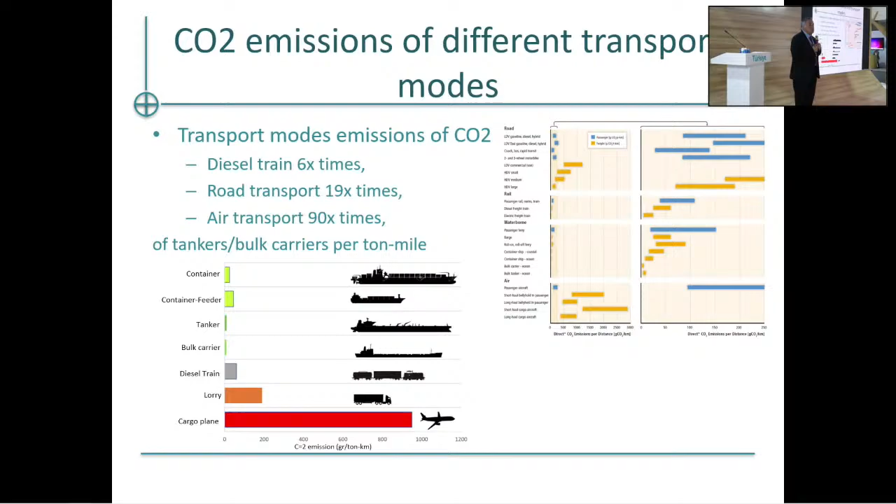Before we start, I should like to underline very carefully, maritime transportation is one of the most efficient transportation means for GHG emissions. Why? Simply, for the carriage of cargo, the tankers and bulk carriers, emissions is only 1/90 of air transport. So air transport produces 90 times more emissions. If you look at it this side, we can say maritime transportation is one way to reduce the emissions all over the world.

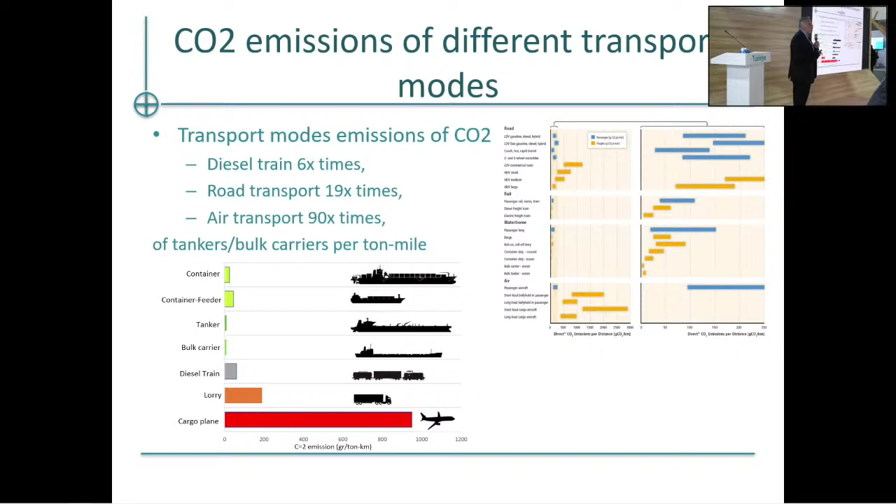Second point, the total emissions produced by the maritime transport is only about 11% within the transport arena. 80% of the cargo is carried by the maritime transport, but only 11% of the emissions.

We need to go back and start up from the main principle. The principle is the fossil fuel consumption is the main reason behind the emissions in the maritime industry. If you are in a land transport, there are other options. But in case of an international maritime transport, this is not possible. And let's not forget, 1 ton of petrol products, which can be a heavy fuel oil or it can be diesel oil, produces 3.2 tons. That means we are actually increasing the quantity by the consumption of the fuel.

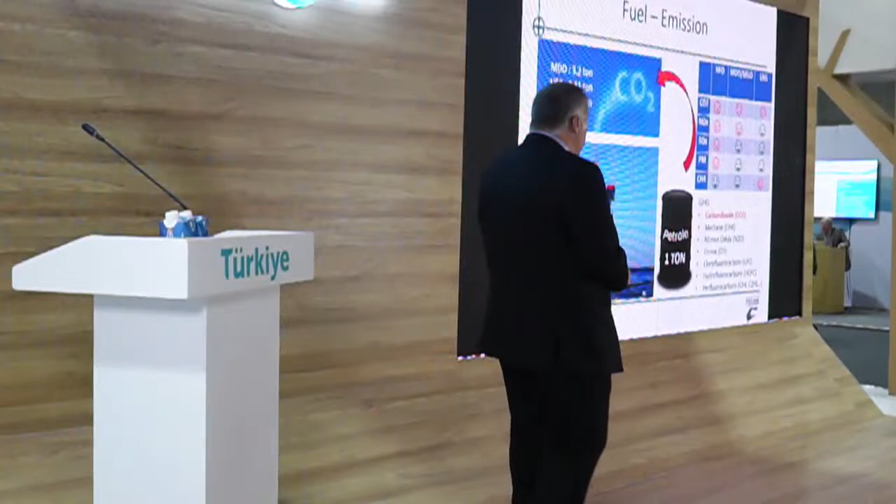There are lots of rumors saying that LNG is a solution, which is not, unfortunately, because LNG's emission potential because of the fuel consumption is 2.75 tons instead of 3.2. So only about 20% reduction can be achieved by use of LNG.

So what is the drive behind the decarbonization of shipping? There are different ways to look at it. First, we can look at it from energy efficiency. Secondly, we can look at it from new alternative fuels, which will be different from a road transport point of view. And lastly, we can talk about carbon capture.

What are the obstacles? The first obstacle is the production of the alternative fuels. Storage difficulties, non-availability, lack of experience, and finally the cost. People are talking about utilization of hydrogen as a fuel on shipping. That isn't an easy process because these problems make it almost impossible for now.

So the projections, the pathways are being lined up for 2050. What is driving it? Which I will be talking briefly about, is IMO regulations and the driving force of the EU, Green Deal mainly, and the charterers and financial companies. Poseidon principles is a necessity nowadays for any maritime transport financing mechanism.

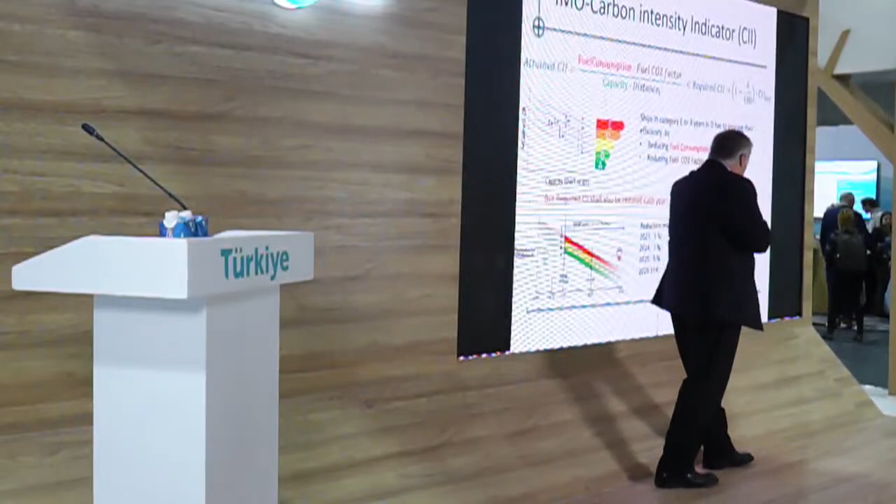An alternative regulation is coming along with the EU, and EU ETS is an extension that includes only the transport mode of maritime. The new regulation will probably come into force in 2023, and it will bring a cost increase for any consumer. All ship travels to and from Europe will be somehow, I would call it, taxed, because it's called ETS, emission trading system.

However, there are no allowances. Everybody pays, all polluters pay. So it's actually a kind of a tax, but the tax rate is found from the European emission scheme. What is the cost for the Turkish side?

At least 125 million euros per year. If the EU Parliament revision is accepted, it's about 250 million euros per year for Turkish ships only. And if it's globally applied, it's about 900 million to 1 billion euros per year. So it's quite a lot.

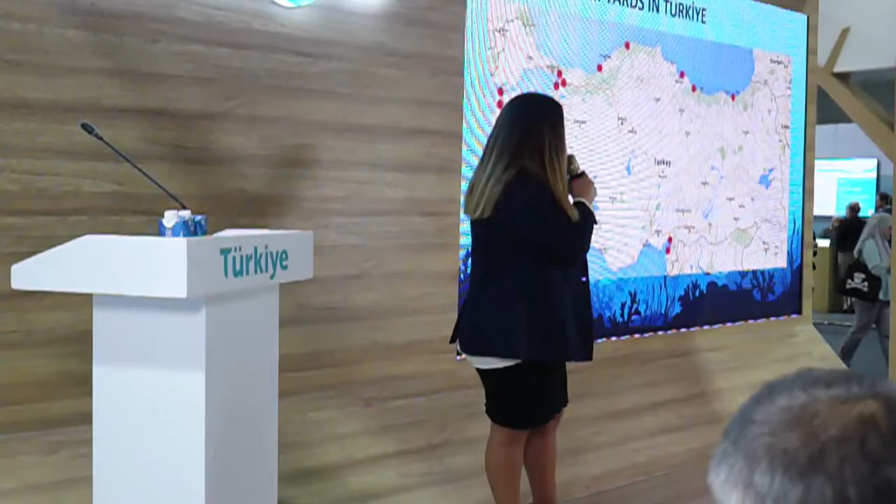Now I would like to explain the environmental impacts of shipbuilding and the measures we developed. Shipyards are very important for Turkey. We have 84 shipyards now. On the map, I illustrated the main districts of shipyards - they are all around Turkey, we have shipyards on all our coasts.

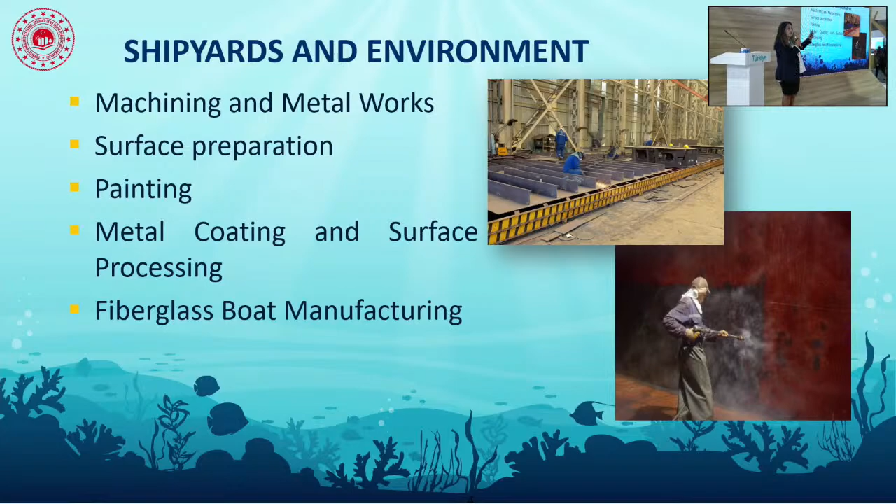When we consider shipyards, this is part of the decision-making process - we try to understand the processes they have. For the shipyards we mainly categorize them into five: machining and metalworks, surface preparation, painting, metal coating, surface processing, and fiberglass manufacturing of boats. These are the production processes we have in our shipyards.

Then we review all of the national and international legislations, conventions, and directives, and go through them. We examine the processes and the possible pollutants. Then we determine the environmental quality status of the sea where we have the shipyards - mainly the most crowded districts are chosen. Then we go through cleaner production options for shipyards.

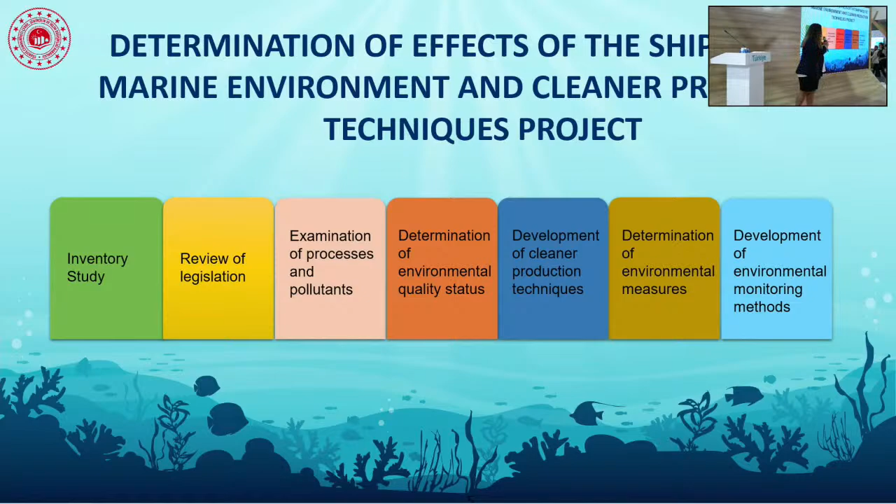This is the most crucial part of this study. We try to cover the literature, but we also go on site and try to develop some measures. Then we determine the environmental measures, considering these cleaner production techniques and mainly the good environmental status of the seas. And then we develop some environmental monitoring methodology - I will explain some in detail.

We go through some cleaner production options. That means we first consider sound environmental management of these shipyards - these are mainly administrative measures. Change of production materials is an option, including design, production, and recycling material parts. We also try to go through better process control, which includes wastewater, water usage, and waste management parts - we develop better options for managing these.

Equipment modification, because the production processes are more or less the same all around the world. This is mainly about the energy. Energy modifications mean having cleaner energy, whether it comes from fossil fuels or renewables, and mainly the energy efficiency of the equipment.

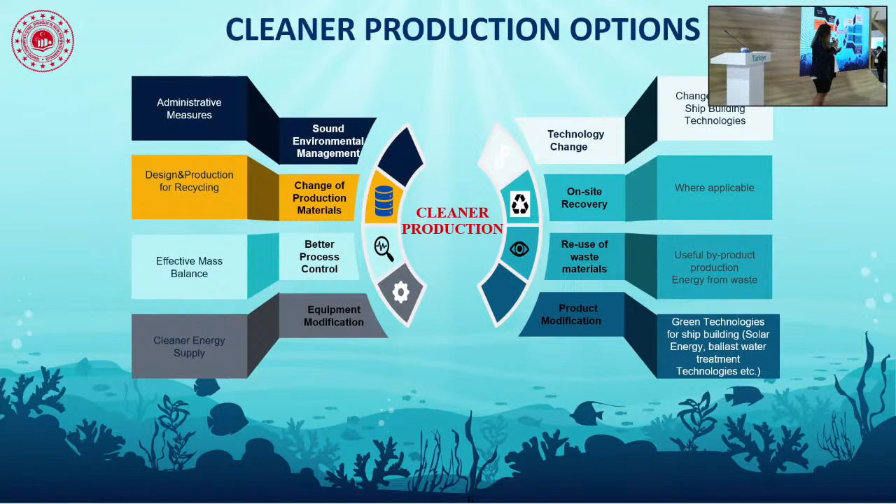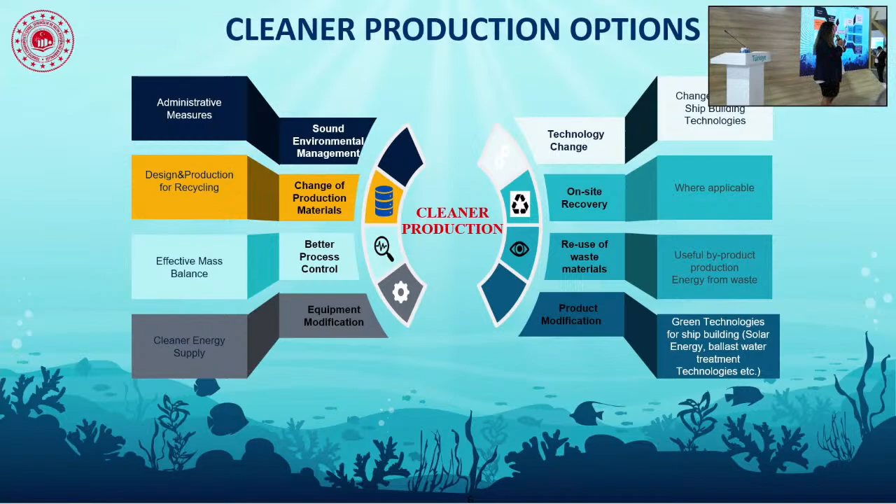And then we go through at last product modification, which is mainly about the ships - the modification of the ships, considering ballast water, energy usage, and kind of.

So we prepared the draft legislation. It's at the last stage, we have the last version in hand. The main aim we categorized them for - they are mainly geared toward the main aim, which is to improve and protect the marine environment.

To have good environmental status of the seas, we go through efficient use of energy. We try to reduce greenhouse gas and other pollutant emissions, and we develop implementation of renewable energy projects in the shipyards.

The first measure is about the ballast sediment. There is a convention named the Ballast Convention, and there is the MARPOL Convention. They say you have to manage ballast sediment. In the ports, it's not available, so the shipyards are the point of management for this ballast sediment. Ballast sediment means the sludge that we have over time under the ballast tank.

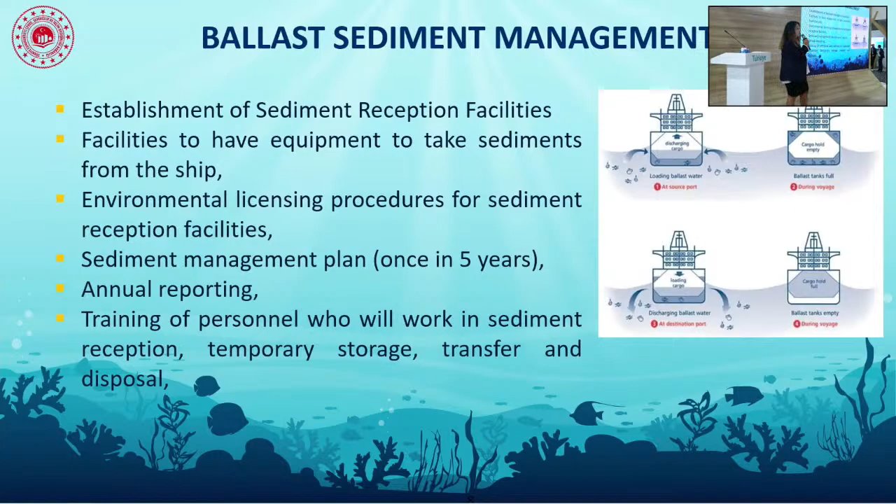So we have the measures. You have to have sediment reception facilities and necessary equipment. Our request is to have licensing for this procedure. We want a sediment management plan to be applied once in 5 years, annual reporting, and training of personnel who will work at these processes. We go through the cleaner production options.

We define some emission limit values for total organic carbon and dust, for completely closed, new production zones. And we said there has to be a tracking system to monitor the docks.

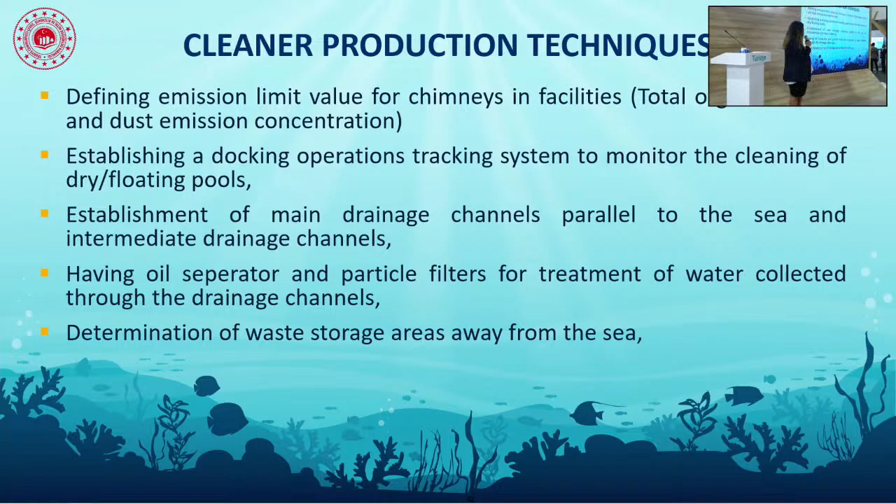And we want some main and intermediate drainage channels to avoid pollutants going through the sea directly. And for this water, the draft legislation requires oil separators and particle filters. They are new for Turkey - this is not something they have in the literature of other international or national legislations. And we want determination of waste storage areas away from the sea to reduce the risk.

So, very applicable, we want dyeing to be closed. And the legislation wants performing surface preparation and painting in a closed and impermeable zone.

Preferring renewable energy sources - all legislation considering best available techniques has musts and offers. This is an offer, I can say very applicable - they have to use renewable energy sources. This is the one that is most related to climate change, directly related, not indirectly.

Reducing the energy used by 20% in 7 years, and electrification of the service boats in 5 years. This is also about carbon emissions.

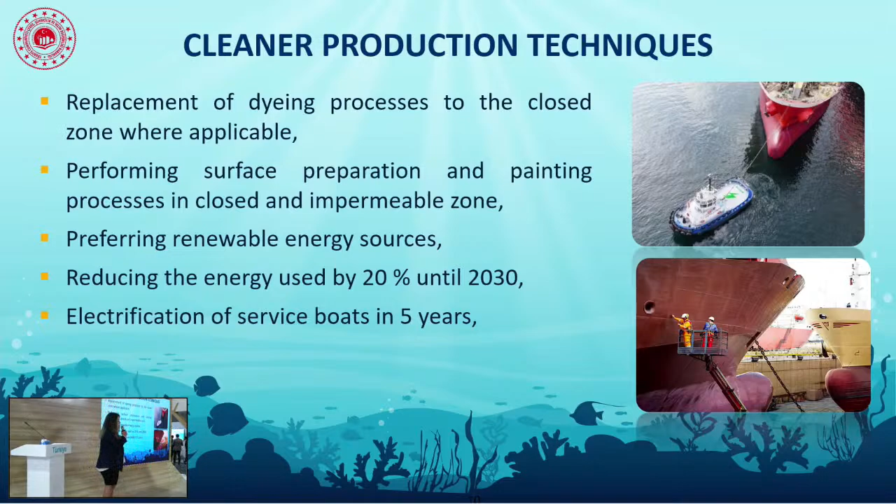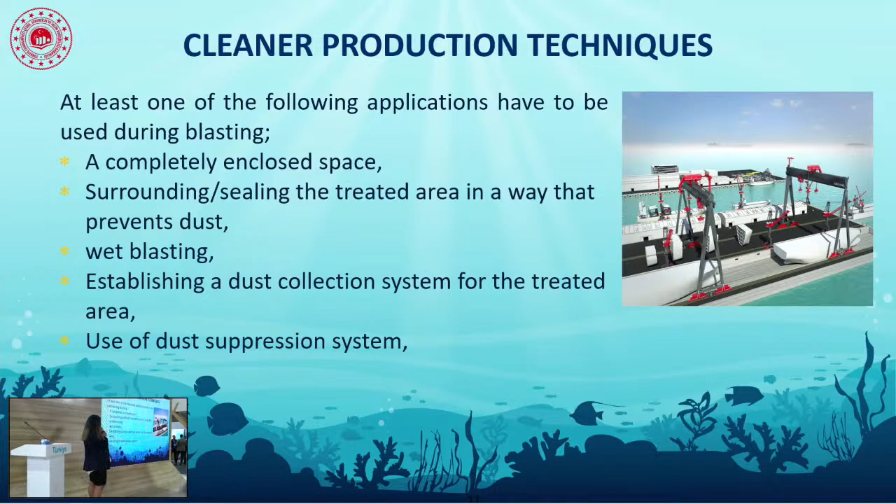We want blasting to be - we want them to choose one, or at least one. It may be in a complete space, it may be surrounded. Wet blasting may be an option, not commonly preferred. We want them to establish a dust collection system or use a suppression system to eliminate dust.

And the draft regulation also requires a report in order to understand whether the shipyards are applying all of these measures, and how. So we want to monitor also the implementation of the draft legislation. We hope to publish them in a short while. Thank you very much for listening.

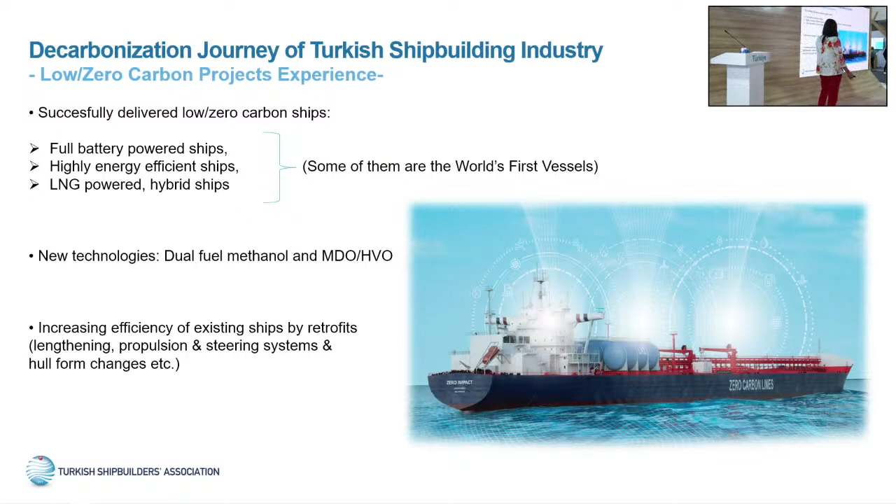And also, as Mustafa Insel mentioned before, there are some technologies that we can use for existing ships and for new ships - new propeller and rudder designs and manufacturers such as gate rudder, twisted rudder, wind technologies, new alternative fuel engines, after treatment technologies.

We are also really experienced with scrubbers and exhaust gas recovery systems, and possible future technologies might include carbon capture technologies - not available yet, but I think we can see them on ships in the near future.

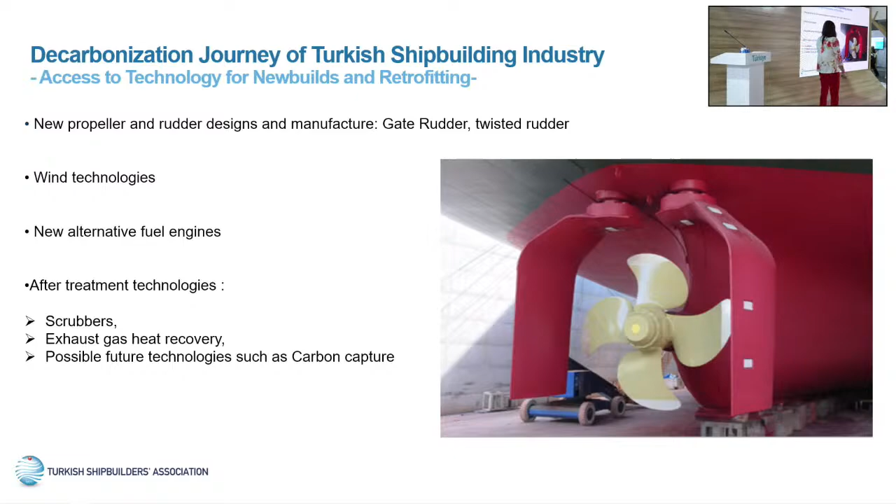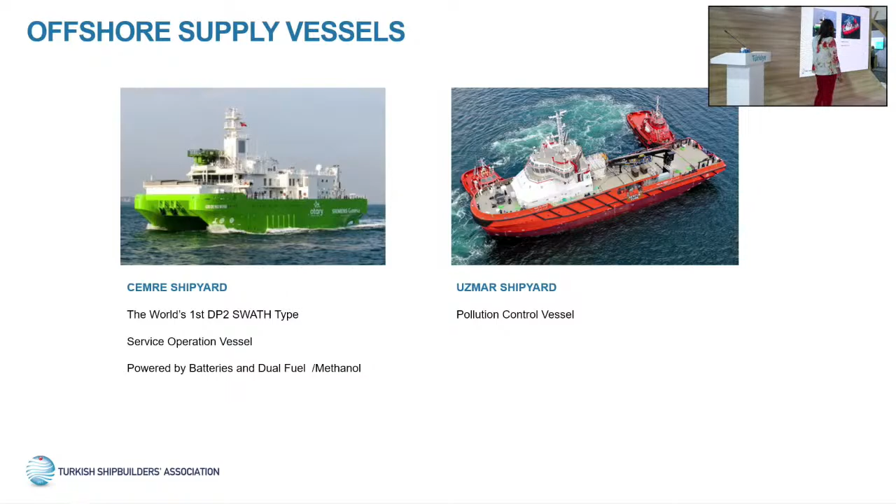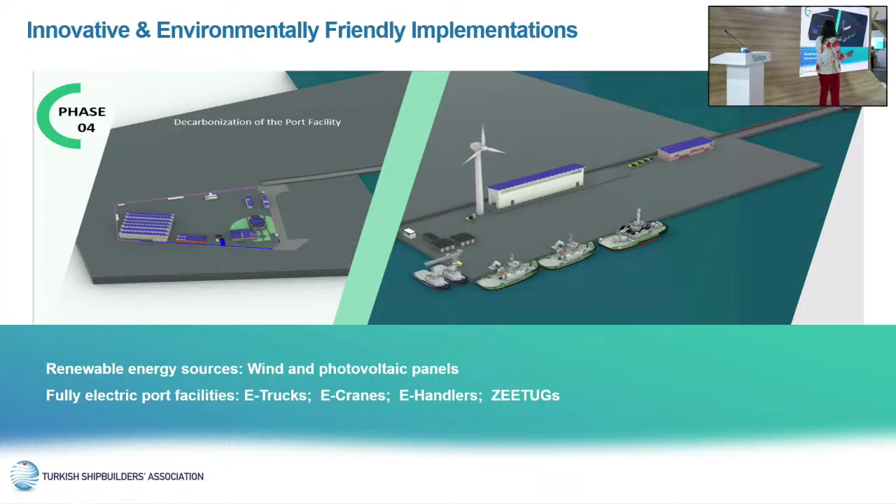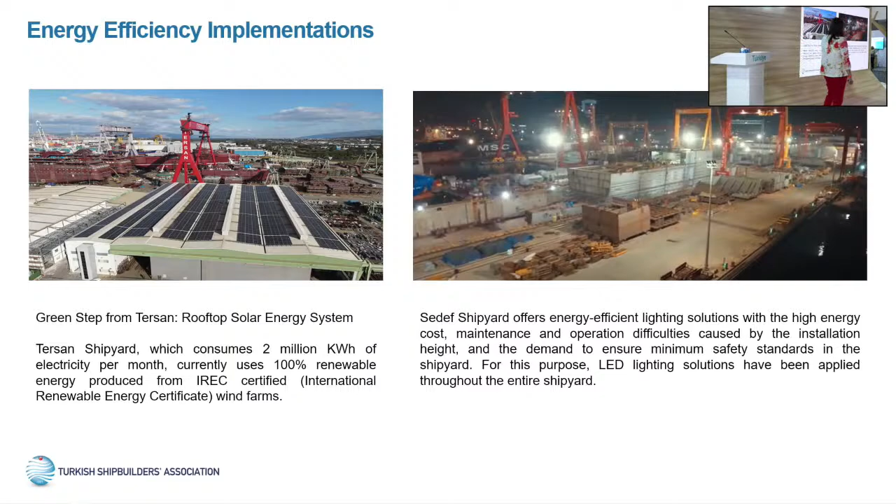What about the shipyards? Nazan has already mentioned there might be some restrictions about shipyard studies. So we are really focusing on new alternative energies and also reduction of GHG emissions due to manufacturing processes. Some of our shipyards are now using rooftop solar energy systems, and also some shipyards are changing their lighting systems.

Also, as an association, we are a member of one Horizon 2020 European project. This is a new technology for the shipbuilding industry. You can see some other partners from Europe, such as European Welders Federation, TU Delft University, Stirweld, Aclunaga, Element Six. Now we are studying the application of friction stir welding technology to the shipbuilding industry.

This technology has some advantages in shipbuilding, as there is no consumable material for welding. It's something like not using any consumable material, like a forging operation. So there is no output, there is no consumption, and also the energy use is more efficient than classic welding technologies.

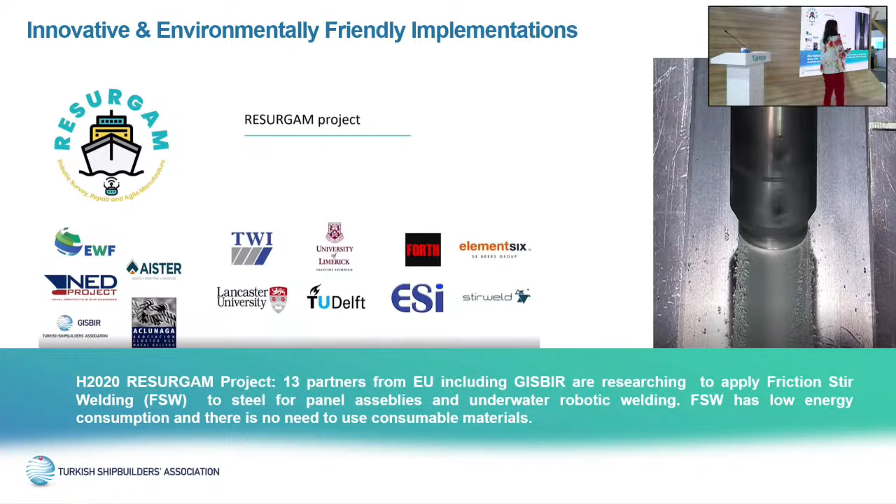And also we have conducted some life cycle inventory studies for various ship types, and we have uploaded this data to an international database. So you can see some Turkish examples in international databases.

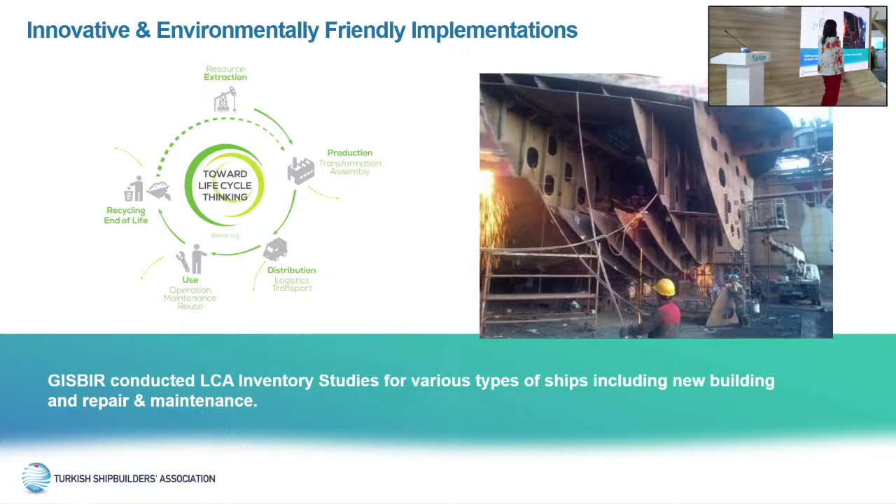And also now we are working on some proposed funds about World Bank and EU proposed funds. One of them is about EU EBRD blended finance opportunities for 4 or 5 small-scale pilot projects in Turkey. It might be about ports, ships, short sea shipping.

And the other World Bank proposed project is about feasibility studies for decarbonization of ferries in Istanbul. It's really important. There is a possibility to decarbonize all ferries in Istanbul if there will be a budget from World Bank.

When we talk about decarbonization, there is a need for skills for engineers and also technical people. Because these ships are really complex, there is a need for engineering - the advanced technologies are really important. So all of the engineers and technicians need to understand state-of-art technologies in detail in order to comply with functional requirements of the ships.

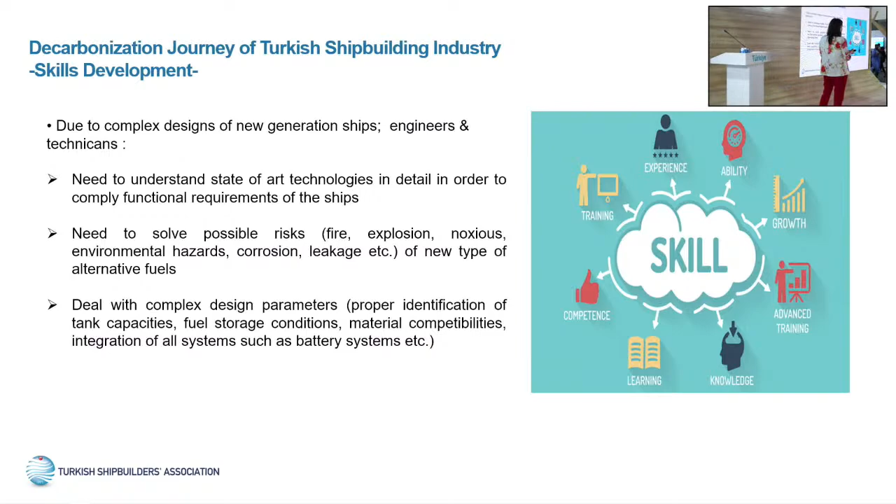And they need to solve possible risks due to new kinds of alternative fuels such as fire, explosion, noxious liquid, environmental hazards, corrosion and leakage, and deal with these complex design parameters.

And also we are expecting software developments for integration of systems and data statistical analysis for operational behavior of ships, and life cycle assessment for ships, including shipyard operational impact. So there might be a need for really experienced people on these matters, and also 3D scanning technologies due to complex piping and installation needs might be very important in the near future.

Thank you very much for your attention.

I would like to thank Ms. Mehtap Özdemir. As you can see, Turkish shipyards are actually a source of eco-friendly ships for all over the world at the moment. So that's something we are proud of.

Our last presenter, Gürdağ Sarıgül, is going to present you something else - the first we have done as Turkish shipbuilders in the world, which is electric tugs and electrification of the Turkish Tuzla ports. And the questions will be after his presentation.

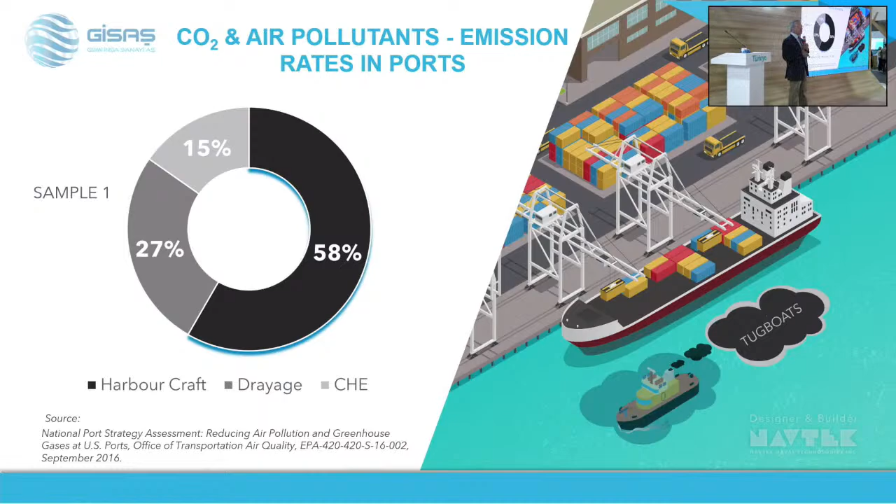Considering that all ports are very close to cities, some research shows that around 60% of the air pollution comes from ports within the city boundaries of the most populated areas.

The project was developed aiming to reduce GHG emissions in the maritime sector, which later leads to decarbonization of the maritime sector. For this project, we wanted to have a best example of innovative actions and technology that a port can use to reach decarbonization.

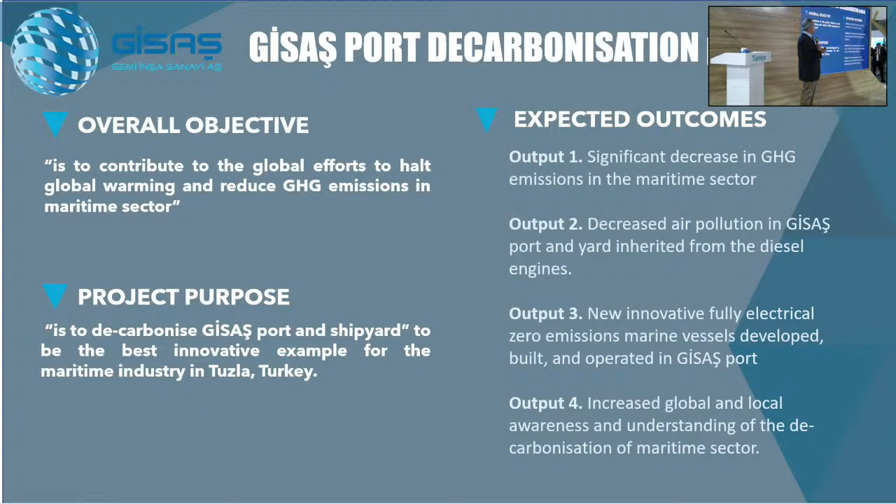There are several outcomes we expect from this project. Firstly, we want to cut all emissions in the port. Secondly, we would like to deploy all-electric vessels for port work, for tugboats and other workboats. And at the end of the day, this increases global awareness that maritime decarbonization is an important element, and that it can happen.

The project is designed in four different phases. It starts with the electrification of the tugboat, then later changing all other vessels, winches, and everything into electrification, and increasing the capacity of the port. At the end of the day, the project aims to reach a completely decarbonized GİSAŞ port.

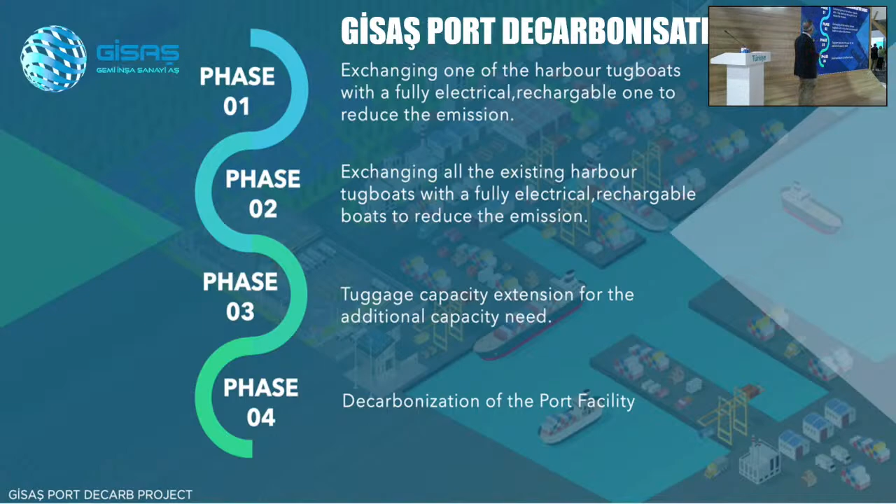As already mentioned, this is the world's first fully battery-powered tugboat. We call it Z-Tug, a brand name. It has become very famous all over the world, received a lot of international awards, and is the only example currently working in any single port worldwide.

This makes it very unique, as Mehtap mentioned—the second one just met the water last week, and there are two more under construction. It's like a Tesla in the water in terms of the maritime sector.

It's an extremely important innovation and showcase—a fully electric tugboat that has now been under operation for more than two years. There are significant benefits in terms of operation and maintenance cost: more than 50% savings in fuel cost, and total maintenance and repair cost is almost 80% less.

This has a very important element for the operator of this kind of vessels, because when you have these vessels, that means you don't have any problem most of the time, and the problems are much more easily solved because everything is electric and electronic, and you have only one single, very simple electric motor at the end of the day.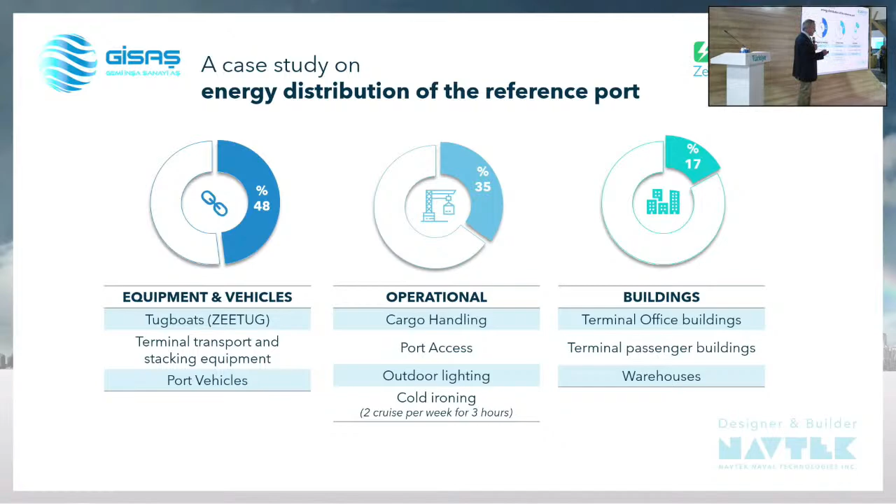We looked into the typical energy requirements for the type of operations a given port has: 48% is equipment and vehicles, which includes tugboats, workboats, and other moving works. Then there are operational systems like cargo handling, port access, lighting, and cold ironing, which is the onshore electric power for vessels. Buildings account for 17%.

We did an estimation about the energy consumption, and at the end of our calculation, we're talking about 20 million kilowatt hours of energy consumption, distributed along the different types of operations in the port.

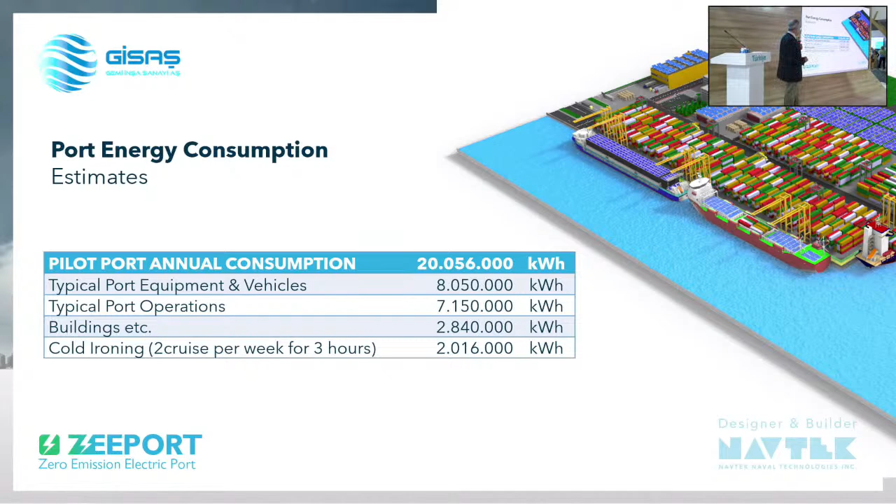We calculated how we are going to provide the required renewable energy to meet this demand. We studied and assumed that we will have a 2 megawatt solar power plant, which would generate annually 3.5 gigawatt hours of electricity, plus 5 megawatts from wind.

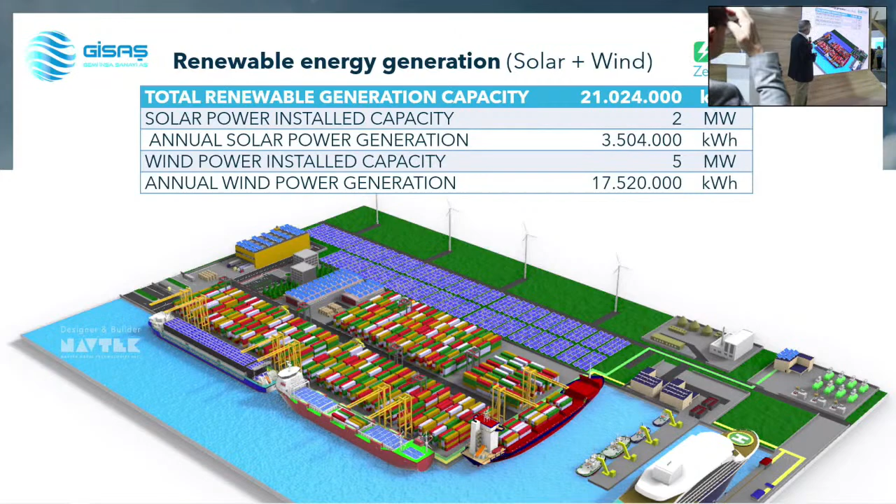These calculations led us to see how we can get there. At the end of the day, our renewable energy production is going to be more than what the port needs annually, which gives us a surplus of electricity that we could sell to the grid, or alternatively store it.

You can store it in lithium-ion batteries, or also in hydrogen form. Those are the kinds of possibilities we have to store energy.

At the end of the day, we calculated how much this investment is going to cost. Our calculation is a bit outdated now, because in the Eurozone we're talking about a minimum of 20% inflation on any equipment you buy. But at the time, we estimated about a 42 million euro investment needed.

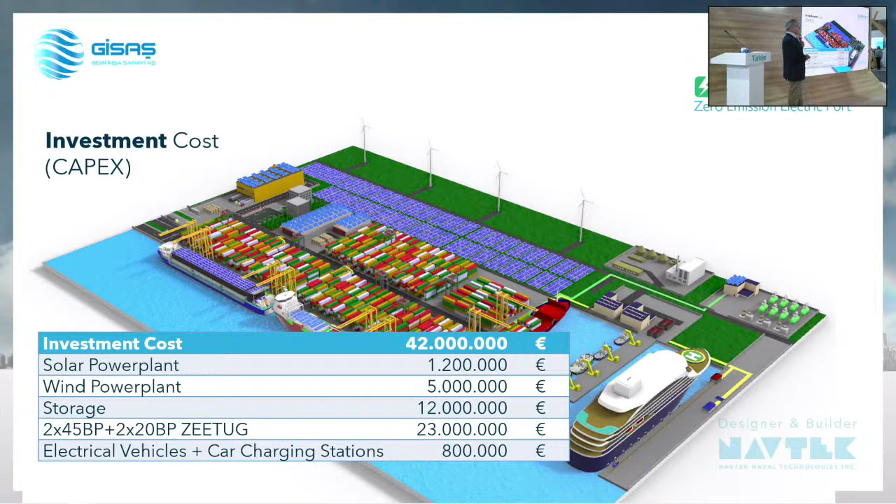The question is how are you going to get this money back when you invest in this? There are a lot of savings when you invest in fully renewable energy systems in a given port. You sell some of the energy, and you save because you don't use diesel and other things. There are a lot of savings.

When you calculate it, it turns out that you make around 7.3 million euro revenue annually. When you put everything together in the cash flow table, you see a remarkable return on investment of just a bit more than 5 years.

This was our conclusion: investing in decarbonizing a port is going to be economically feasible and also environmentally very effective and beneficial in terms of cutting emissions down, also improving the air quality where the port is in operation.